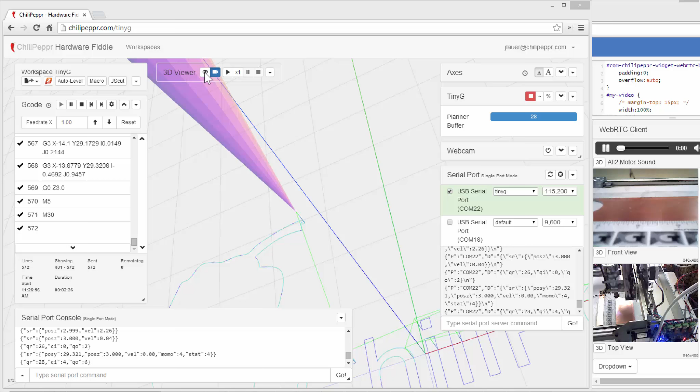Hey there, I'm here to talk to you about some of the new updates to the Serial Port JSON Server. I did a lot of work to build in a new buffering scheme to the Serial Port JSON Server. And so to show it off, I'm going to go ahead and run a Gcode job on that ChiliPeppr logo with this delay set to 5 milliseconds.

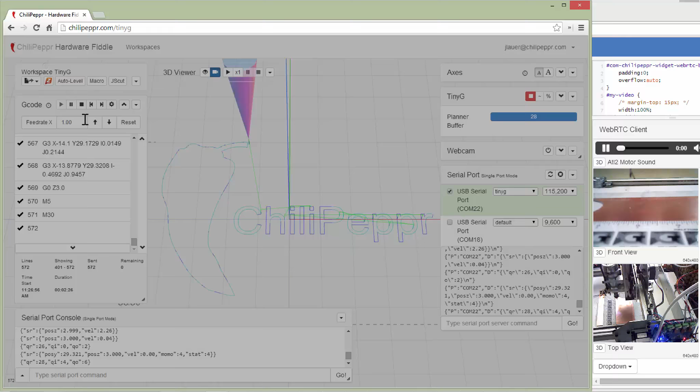Now, if you have seen this dialog before, if you've gone into it, I was suggesting a 200 millisecond delay before. And so I'm going to show this at a 5 millisecond delay just so you can see what this looks like. So I'm going to go ahead and run it. You'll notice that I've got a video going through the WebRTC client of the CNC machine itself, so you can see all the lights blinking on the machine.

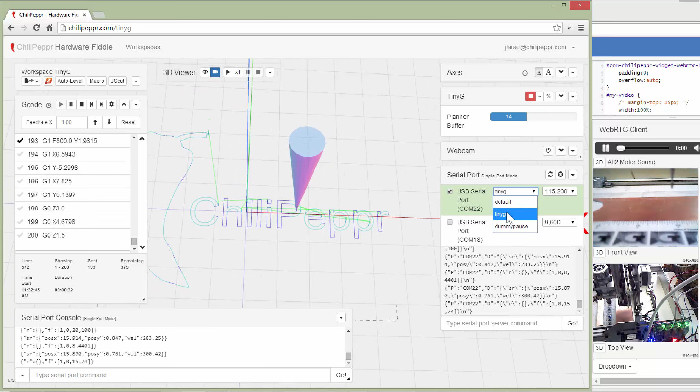Okay, so here's some of the differences that you'll notice while this job's running. One is there's now these new pull-down menus in the serial port widget to pick a buffer flow algorithm, and that's new. That's not been there before. And when you pick that algorithm, it puts the Serial Port JSON Server into an alternate mode where it delegates the sending and receiving of the serial port to a custom protocol specific for that device itself.

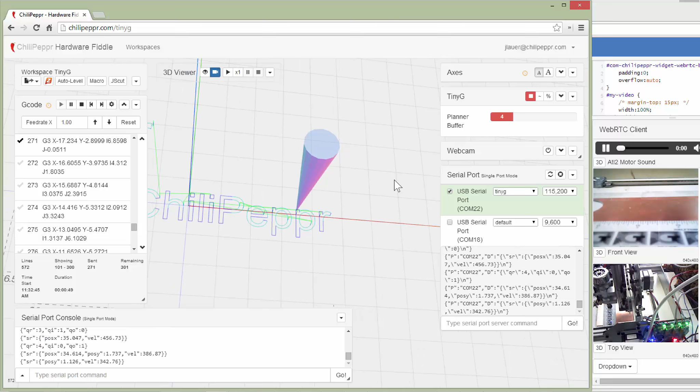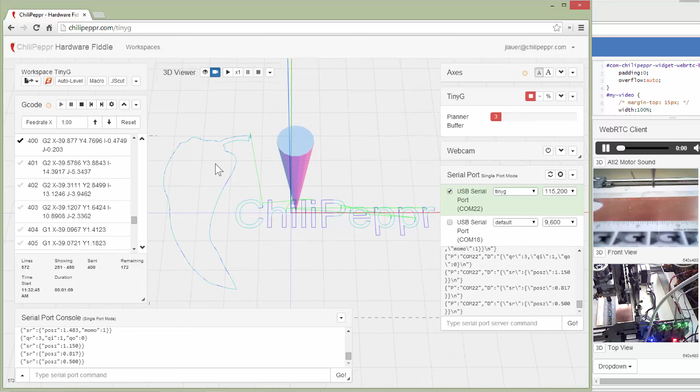And so that's also coupled with the fact that you can now queue up to 25,000 lines, Gcode lines, or really serial port commands on the Serial Port JSON Server itself. So that means that the browser can just pound in Gcode lines as quick as it wants without worrying about the throttling going on.

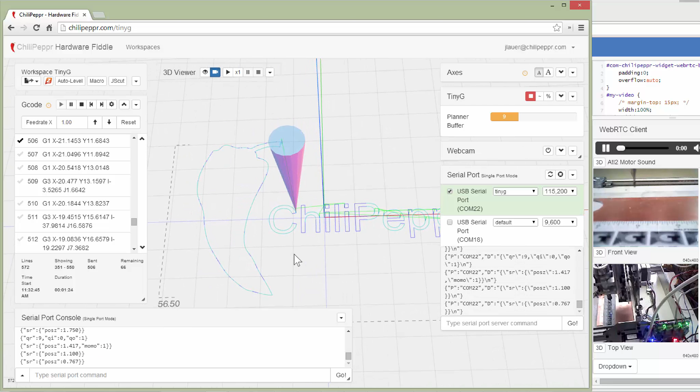And the reason is, and you're maybe catching some of it right now, the reason is that the browser and the WebSocket are really amazing, but that whole round trip I was finding, depending on your network connectivity, could be somewhere around 100 milliseconds of sending and then getting back. And what you really need is more like a 5 millisecond response time to correctly not starve this planner buffer. I'm going to quiet down here as we get to this really crucial part.

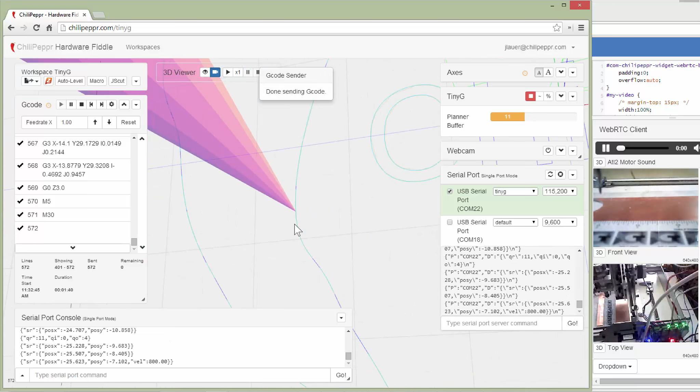Notice how fast that's running. So there's a little bit of lag here as I'm doing the screen recording, but that was really fast. There was no hesitation at all. We got everything completed, and the job is now done running. So pretty good response times. Now, just to give you a comparison of what it used to be at, I'm going to go ahead and put this back to 200 milliseconds, just so you can see how the job ran before.

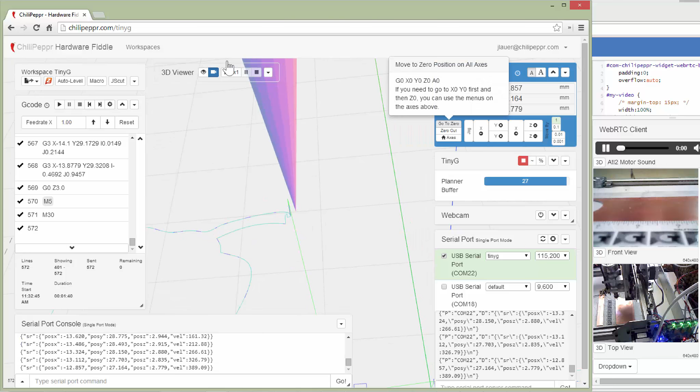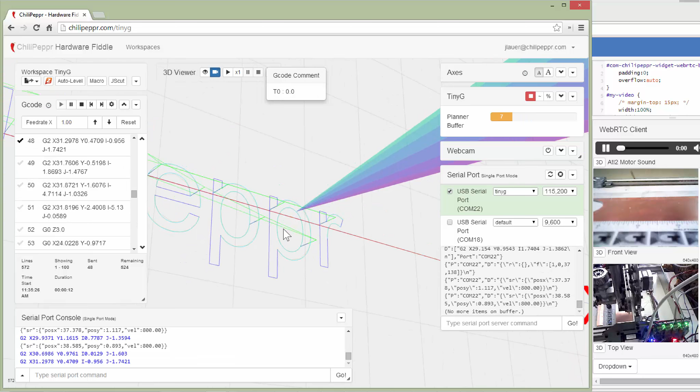So let's go ahead and re-zero out. Not that we really have to. Okay. So that's re-zeroed out. I'm going to run the job again at the 200 milliseconds. So we'll let that go. A lot of these initial moves are just straight lines, so those were pretty much okay before, but some of these arcs are made up of little pieces, and those will still run slow.

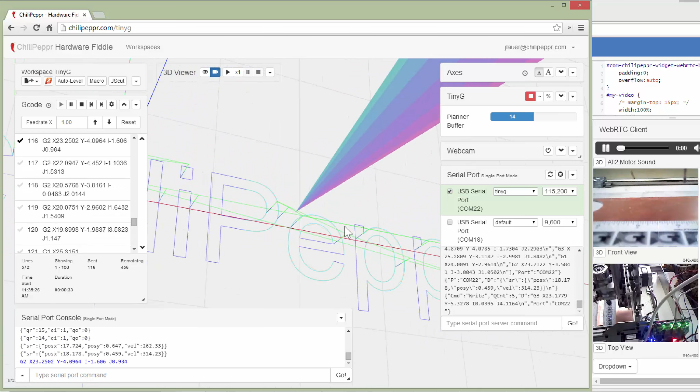Again, sorry about the lag as I'm doing this. I'm also running this CNC machine from Michigan, even though the machine itself is sitting at my house in Seattle. So I have a lot of lag over the internet, over 2 cable modems to run this job, which I would actually say is pretty cool that this is working perfectly. Because if you watch this run, there's no real missteps happening.

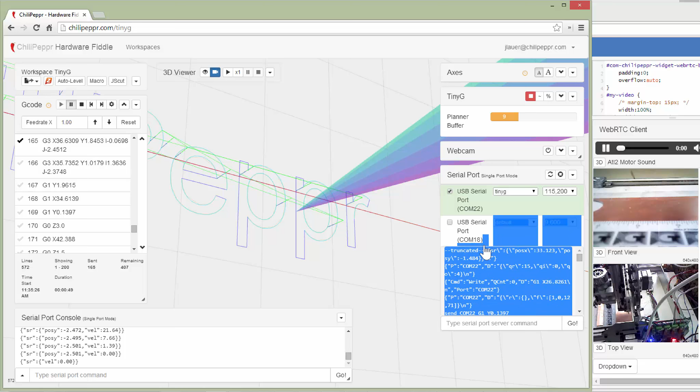Okay, so while that's running, I do want to show you, I'm going to pause it really quick. I'm going to show you a quick review of what the server's doing to show you some of the new stuff. So I'm just going to copy that, select all, paste, and then I'll rerun this. I'll resume it. Okay, so that's running again. Let's go to the top. So notice that I've got, did I cancel the job? Oh, no, it's unpaused. There we go. I forgot to unpause it over there. Okay, so

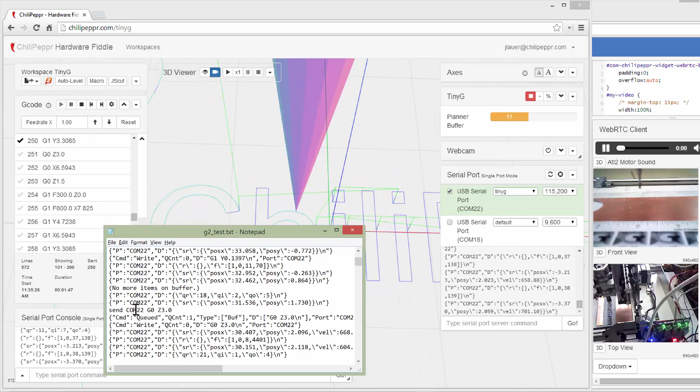notice that as an item comes in here, one line of Gcode is sent. This is a new report from the Serial Port JSON Server. It actually tells you how many items are in its queue, what type of item, buffered is the default, and then the actual item itself. We'll see if we can get any lines of code here where there were 2 queued up. We probably won't, because when you're running at 200 milliseconds, you don't get a lot of queuing.

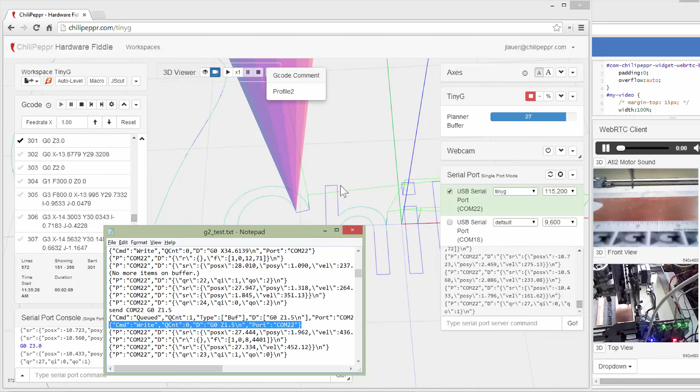No, looks pretty normal. But it tells you when it queues, and then it tells you when it writes. So you get 2 commands back for each Gcode. Fortunately, right now, you also get back your Gcode command in case you want to match it back up in your code. I'm going to quiet down here and let you see the problem with the 200 millisecond. You'll see how slow it runs as it gets to some of these.

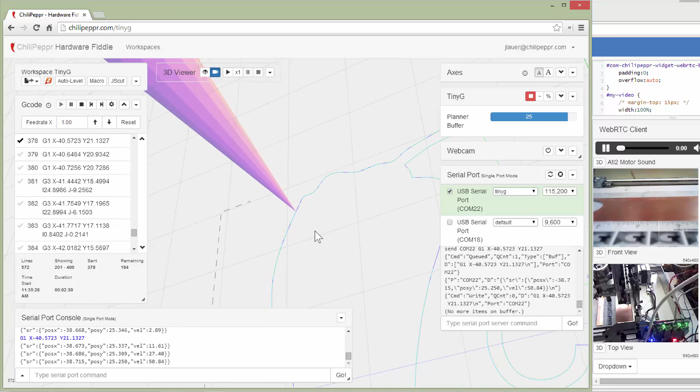Notice that planner buffer is up at 24, 25. It's just getting starved. So that was the real problem before. It's just going way too slow. So that was frustrating me. I wanted to fix it. Again, if you remember when I ran this the first time in this video, this was just screaming fast through this section. And right now, the sending of the Gcode is just barely keeping up with the planner buffer.

So these new updates and the new queuing and write responses from the Serial Port JSON Server are a pretty big move forward. So we should be good.